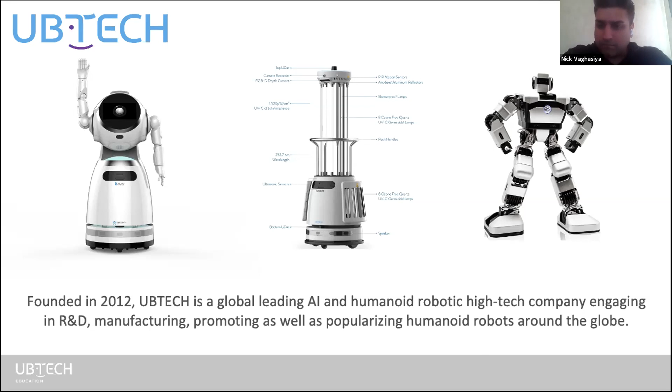To go into depth a little bit about the education division, UBTECH Education is a division of UBTECH Robotics, our global brand. Our primary resource is preparing all learners for the future of work, whether it's through innovation, technology, design, engineering, and even tying that into our core subject areas for today's learners. And developing and giving them the opportunity to have a high quality STEM product that allows them to grow into 21st century skills and utilize their computational literacy skills.

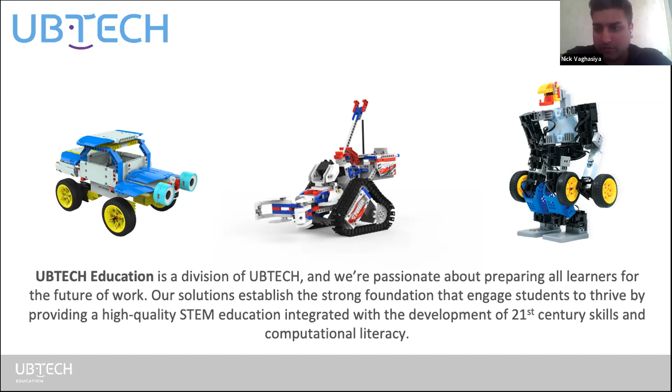And what you'll see here today is our U-Kits. This is one of our most popular classroom solutions. You'll also see it behind Matt in his backdrop. You'll have the beginner, intermediate, and advanced U-Kits. These are really an all-inclusive solution for students and educators.

They do come with all the parts and pieces. They come with the sorting trays, the cases that are stackable. They come with all the curriculum that's going to be required for teachers to utilize in teacher implementation guides. They're going to have teacher guides as well. And then they're going to have student worksheets that compile together with the free education app or web browser.

This will work on. As you see in this product, one of the philosophies that UBTECH has is that we want students to progress in their learning and their skills. So as students progress, so do the challenges and the kits. We're not changing the product on them, but we are adding new components, features, and things for students to utilize while they're developing their STEM skills.

As we dive deeper into each one of those U-Kits, I'll tell you a little bit about the beginner kit. It is an entry-level U-Kit. It does come with over 300 parts and pieces. And what's unique about this is along with the parts and pieces, you get 4 servo motors that students can program and utilize in the pre-built models.

This U-Kit particularly has 13 pre-built models. Each one of the pre-built models also comes with pre-scripted code so that for students that are visual learners, this is going to be a very helpful tool while they're utilizing the kits. It essentially allows you to start coding immediately and utilizing the robots.

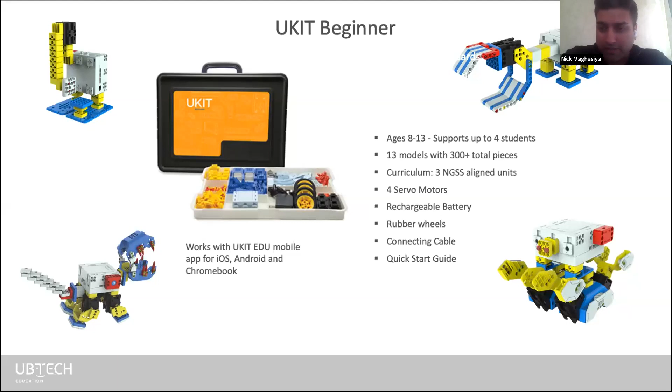Our next U-Kit that we have here today is our intermediate U-Kit. This one is a transitional U-Kit between the beginner and the advanced. It does have over 500 parts and pieces included. It looks exactly the same like the beginner, just the color's different, comes with a sorting tray and carrying case. But what we've also included in here is 15 pre-built models.

If you take a look at the images on either corner of this slide, you'll notice that these robotic builds are a little bit more complex than the ones that you saw in the beginner. That is something that we highly take into consideration, which is our scaffolded approach, not only to engineering, design, and building, but also to the curriculum, as the curriculum that goes with these kits aligns to the U-Kit.

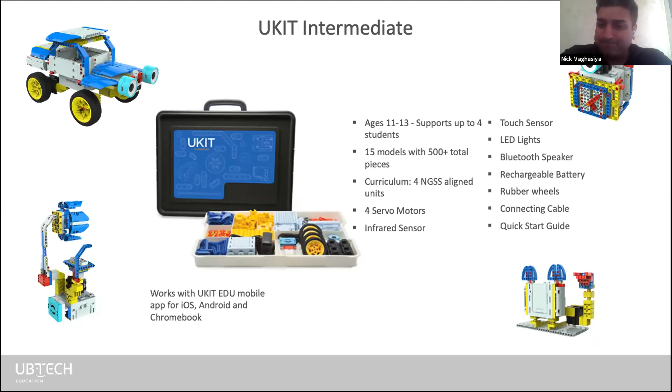Our final U-Kit that we have here for the classroom solution is our U-Kit Advanced. This U-Kit is something that I think is very extensive. It comes with a ton to do for educators as well as students. For example, over 900 parts and pieces in this U-Kit, but the look and feel of the case and sorting tray is exactly the same. There are some key attributes to this.

Going from the beginner to the intermediate, we are introducing sensor technology. And then in the advanced U-Kit, we take the sensor technology and also integrate it with a circuitry program. So in this kit, over 900 pieces, you'll have 16 servo motors. You'll have a higher grade sensor kit built in that also includes ultrasonic sensors as well as infrared and gray sensors. And then you'll have a circuitry program with circuitry lessons included. This model will allow students to build up to 38 robotic builds, and it does come with a different platform for learning.

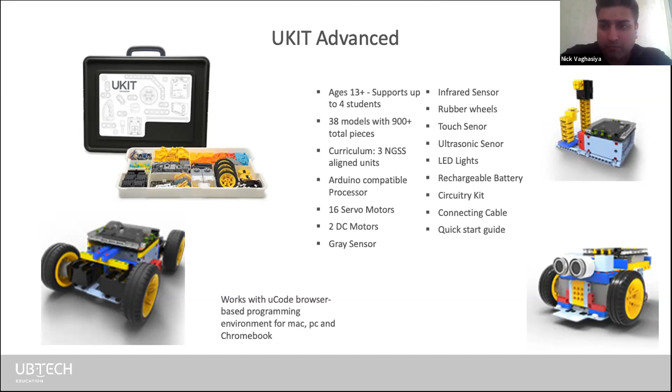So the UKIT Beginner and the UKIT Intermediate both work on a free educational app called UKIT EDU. It is downloadable, accessible on iOS, Android, and Chromebook, covering the full range of what most schools are using today as far as student technology in the classroom. And what's unique about the app is it has core functionalities.

Every product in today's market comes with an app, but what does that app do to create a meaningful purpose for students? In our app, we solve two problems. One, we cater to all learners. We have visual learning ability through our app, which allows students to not only see a code right off the bat, but they can actually manipulate the code, add to it, edit it, change the code for immediate response to the robotic builds.

We also have a tool in our app that is a key differentiator in our solution. We no longer show images of step-by-step guidance, but allow very interactive 3D 360-degree rotational movement for students. What this does is allow for increased accuracy in a robotic build, and it allows them to spend more time learning code and how to see the code.

Also in our app, we have two languages. We've got block-based coding, which is convertible into line text coding in Python. So it does take a progressional step for students that are starters and then getting more advanced into coding.

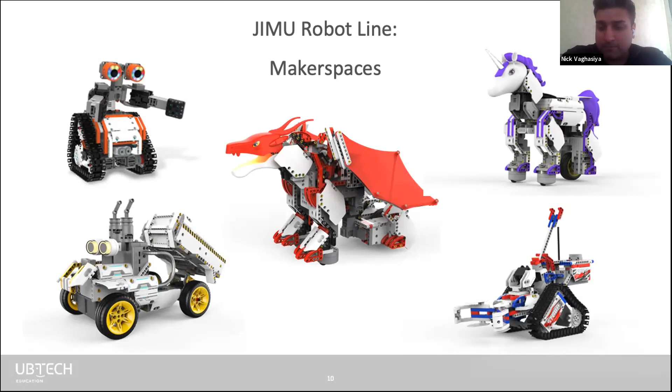And I'm muted, so no, I'm not muted. So thanks, Nick, for the introduction to our UKIT. I'm going to transition the conversation a little bit and move directly into our integrated STEM curriculum.

To give you a high-level overview, we developed 10 total NGSS aligned units supplementing our UKITs. We have 3 units specifically for the UKIT Beginner, 4 units for the UKIT Intermediate, and 3 more units for the UKIT Advanced. All of these are directly aligned to core science standards through NGSS standards.

We have also developed a full K-12 AI Foundations Unplugged solution, which is a new endeavor. This is all unplugged, meaning it's not directly aligned and supplemented with our robotic kits, but it's a way to bring foundational AI concepts into K-12 classrooms.

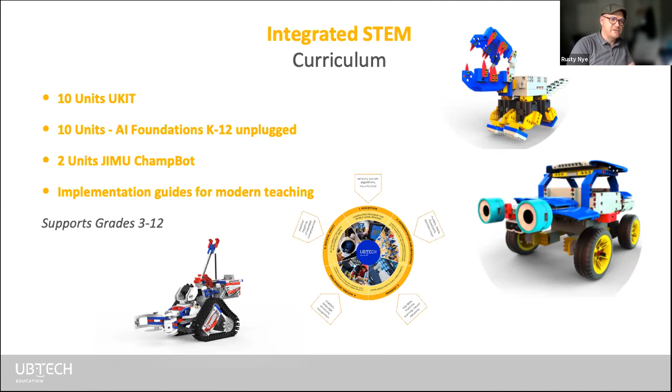In addition, we also feature a full NGSS curriculum with two units that are grade banded for the JIMU ChampBot. And as Nick mentioned, all of our curriculum units feature specific implementation guides, which we created in response to the changing educational environment due to COVID scenarios.

So when we talk about integrated STEM, what are we really focusing on? There are a few pillars for our curriculum that are unique and very important to how we've scaffolded and developed this content. One, all of our curriculum is intended to address core science concepts.

This is important because we want our curriculum to not only live in a computer science or STEM classroom, but we want the ability for science educators to bring our curriculum directly into a science classroom to help supplement some core science learning. In addition, we also directly address cross-cutting concepts in science and engineering principles as identified through NGSS. These connect back to cause and effect, patterns, and connections to the engineering design process.

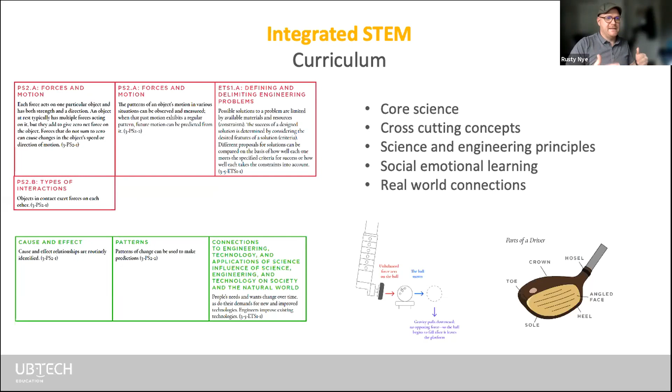In addition, we do directly acknowledge social emotional learning, such goals as leadership and working together throughout the entire curriculum. And finally, the last pillar that is a direct theme throughout our content is we really strive to make real world connections. So students are not just building robotics or coding for the sake of it, but they can see actual connections out in the world.

Our curriculum is all scaffolded utilizing the engineering design process. This is important to note because we strongly encourage students throughout all of the units and all of our curriculum to really participate in this design cycle. So students are really working through frustrations and failing upward.

For the educator, we have developed all of our content also in the 5E lesson plan structure. Most educators are probably pretty familiar with this structure, but this is a great way for educators to dive into content, know exactly the milestones that the students should be gaining, and where they can plug in particular aspects.

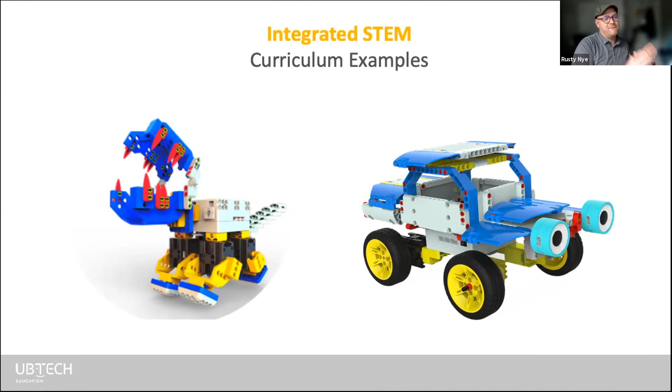So I'm going to transition a little bit and give you a couple examples from two of our curriculum units. I'll touch on an example from our UKIT beginner curriculum unit, featuring our dinosaur robot on the left side of the screen, and also feature a snapshot of one of our intermediate lesson units featuring our trolley robot. All of our units for UKIT and Champot are featured around a design and iterative approach to one of the robots they can find within the app or the browser-based software.

For the curriculum unit for the dinosaur robot entitled A Robot for Rescue, students are given the driving question of finding and discovering which robot design best meets the criteria and constraints of a rescue robot. The way we blend this into core science concepts is by exposing students to concepts of geology and biomechanics as they're building and redesigning this robot to render aid during a volcanic natural disaster.

So I know that might seem like a lot. How do we actually mash all that up together? First, we introduce a real world scenario of what a volcanic natural disaster could look like. To do that, we point directly to something that most of our students were probably born when it happened: in 2018, there was a large explosion, an eruption on the island of Hawaii, the volcano Kilauea.

So we paint a very realistic, touchable approach and scenario for the students. From there, we have the students start analyzing the geographic regions and the changes caused by such an explosion or eruption. They generate different sketches, analyze different scenarios, and think about how this would affect their robotic design.

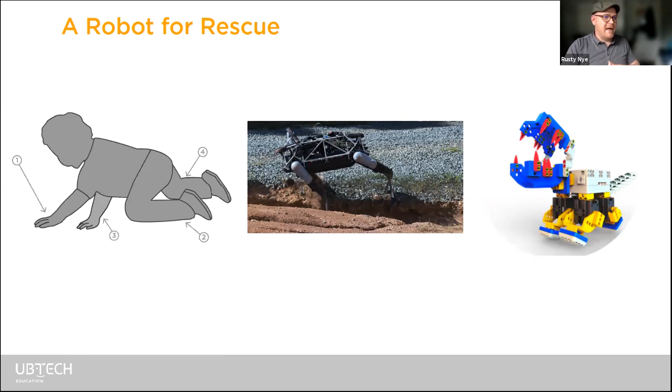So I'm going to transition and give you one more short example, looking at how we try to tie in these curriculum units back to core science standards as well as real world applications.

For another unit, a robot for tight spaces featuring our Trolley robot from the UKIT Intermediate. Here, students explore how robots can be used to help explore industrial settings as they build and redesign this robot to navigate through changing environments. The driving question students will be able to successfully answer by the end of this unit is: what is the best robot design for navigating through a pipe?

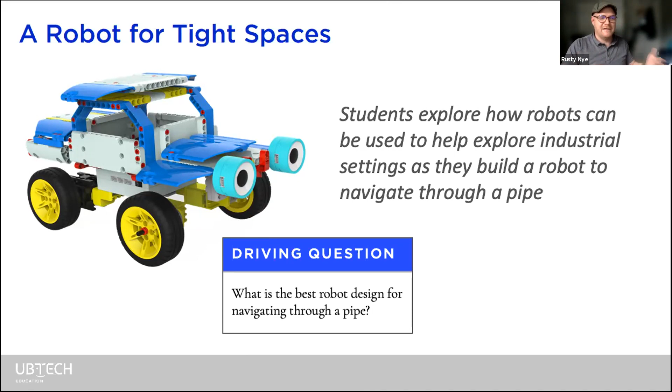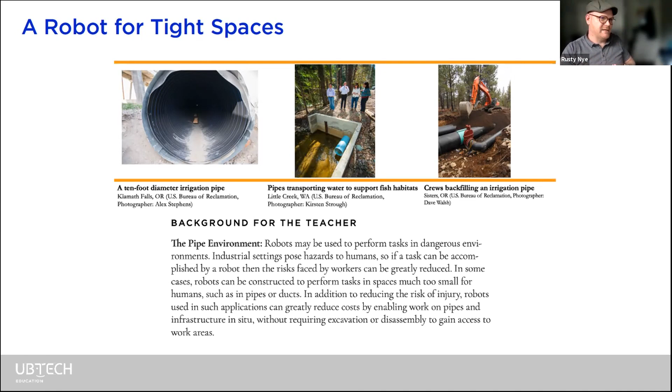That is a very open-ended question that can be answered through a lot of different lenses based on their discovery. So first, we start analyzing environments, making that connection back to real-world applications and careers of engineers trying to solve this problem, and start looking at different pipes. We provide the connection to actual engineers doing this exact work and the constraints they face when designing different types of robotics to fit in said pipes.

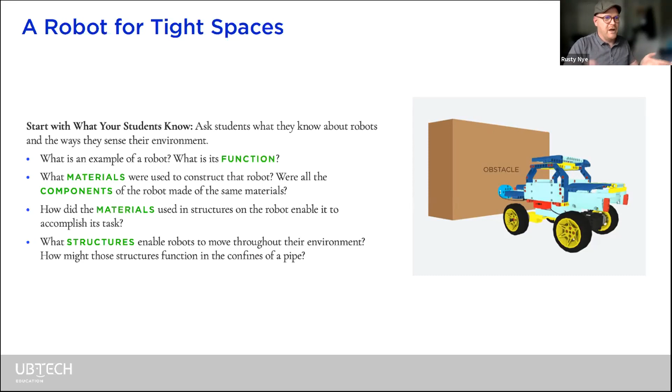From there, students start analyzing the function, materials, and structure of the robot they're working with. We try to make that connection from an engineer working in the field, looking at a pipe and having to design a robot that fits through it, to looking at the robot they've built and analyzing its function and materials. How can they change their specific robot to meet these changing constraints we've set upon them? Throughout the curriculum, we change those constraints, so students have to continually analyze and change their objectives of developing their robotic strategy to solve the problem.

Also, in terms of equipping students with future job skills and trying to bridge the gap between engineers working in the field and students working with classroom robotics, we've done quite a bit of research trying to understand how we can fold in some of those top 10 job skills that need to be developed for students moving into career fields. To help highlight those learning aspects, we've aligned quite a bit of our content to the top 10 job skills of 2025 as addressed by the World Economic Forum.

I've highlighted just a couple here as a snapshot, for identifying and addressing those analytical thinking and innovation skills. Throughout all of our units, students help solve complex problems directly connected to real world life experiences. We really try to bridge that gap to tangible concepts, so we don't want this to live in the cloud and not be something they can directly relate to. We hope most students haven't experienced a volcanic eruption too closely, but that's something they can easily look up, something currently happening that they can relate to on a real human basis.

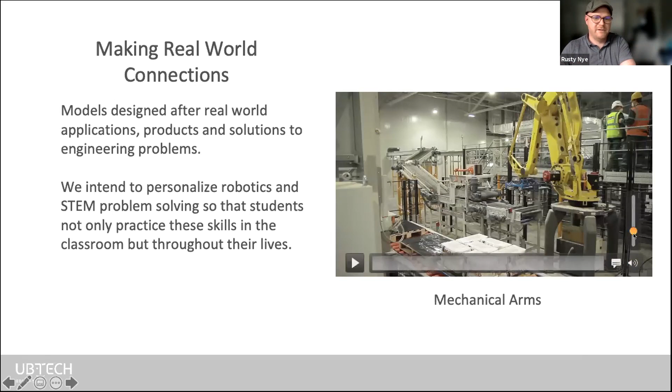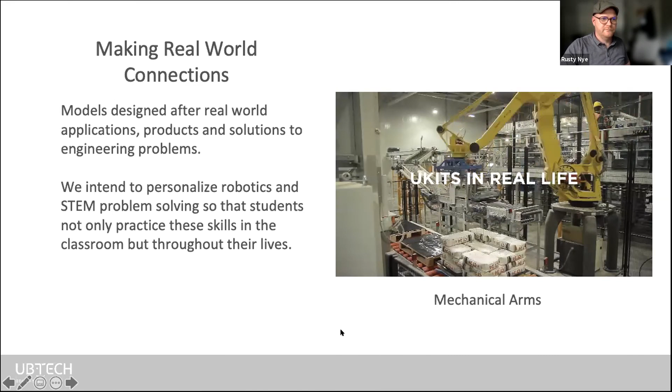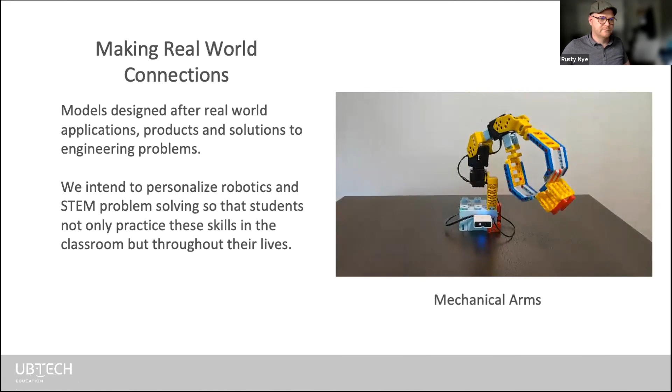So let's go ahead and look at a couple of different scenarios, looking at mechanical arms. This is featuring, as you can see, an IR sensor activating.

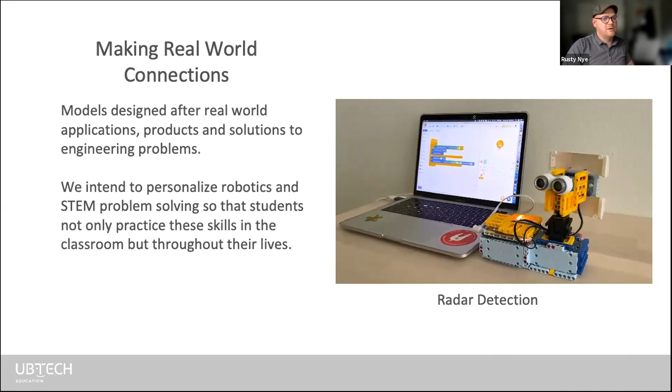You have 3 servos in that build, and that is for the UKIT. This one is featured within the UKIT Advanced, and is actually inspired by creating a radar detection robot. It utilizes 1 servo connected to our Arduino compatible microcontroller, and an ultrasonic sensor to give out a reading in a very similar aspect to a radar detection device.

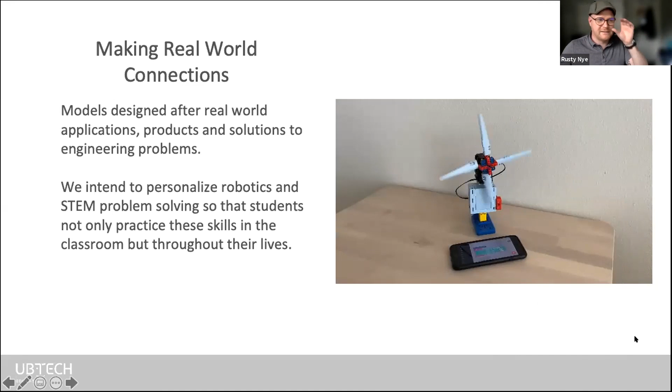We also try to utilize greener engineering technology for some of our inspiration. This is an example of utilizing wind turbines specifically for our robotics as a motivator. This robot is specifically geared and featured in the UKIT beginner. However, we actually have very similar builds, as well as a virtual greenhouse build for our UKIT advanced.

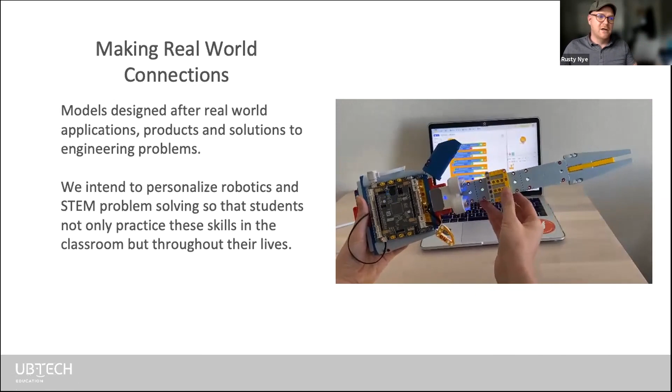We're not all stuffy engineers here, we also want to make it a lot of fun. So we even have different musical instruments that students can build and be inspired by. This is an example of our bass guitar, utilizing our UKIT Advanced and an ultrasonic sensor that can detect different distances and make an equation. We can write a program that when it detects distances from certain parameters, it will play a specific note. That's a fun one.

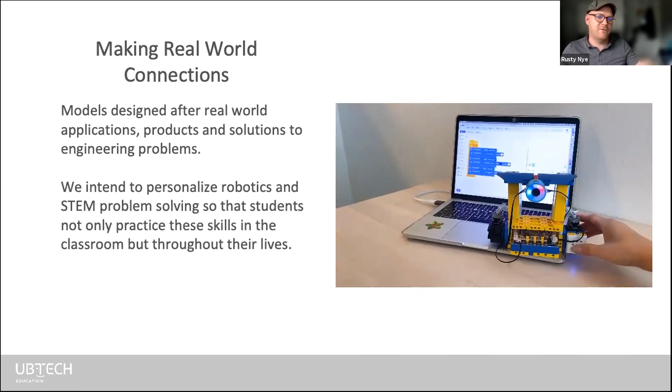We also engage and try to connect to smart home technology. This is an example of a doorbell robot. For the UKIT Advanced, it utilizes 2 servo motors and a touch sensor acting as your doorbell button, which also activates one of our really fun LED eyes, which give all of our robots a really nice personality.

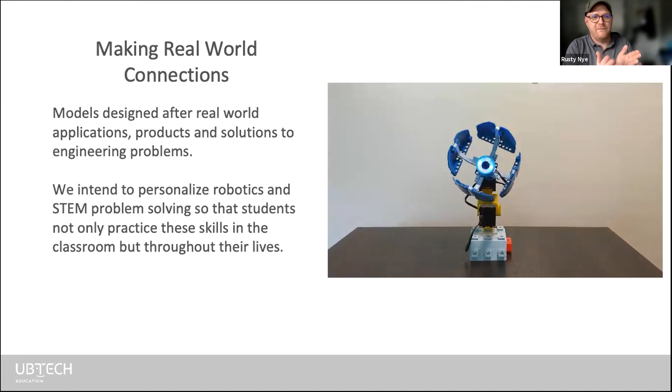And then lastly, who doesn't like to have a party? So this one is our strobe light robot, which is inspired by disco lights. This one is directly aligned to our UKIT Intermediate, and features 2 servo motors and a flashing RGB LED.

So Susan is asking, since it uses block coding, can her kinders do it? They already do block coding with Dash from Wonder Workshop. So she wants to know, are the JIMU robots and the UKITs compatible with her younger students in kindergarten?

Yeah, Nick, feel free to take it. I would say it depends on their level of comfort with block-based coding. Our coding is very similar to Dash and Dot and what you can do with Wonder Workshop. The difference in our app technology is that students get to build their remote or control device in our platform, in the UKIT app, as well as the basic functionalities. So if they're familiar with Dash and Dot and utilizing the coding that comes with the blocks, they can certainly do that with UBTECH's beginner. I would probably say start them off with the beginner UKIT.

In the AI library of the app, we have sample code for each one of the 13 robotic builds. So once your students are building the robots, they'll already have what the block code structure looks like for a basic movement, and then they can take that and alter it, change it, and edit it.

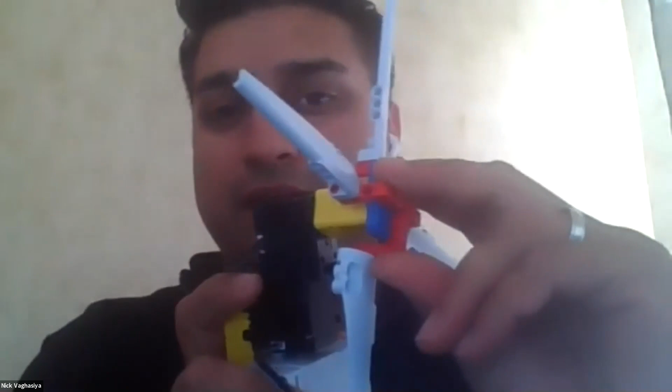I'll actually show you a sample because I do have a fan here. If you take this fan and rotate that servo movement manually, that movement is recorded into block-based coding. Essentially what we're calling it is reverse coding. We're the only ones in the market that have it right now.

So our app is used very differently than the other products mentioned. Not only is that a key differentiator for us, we have a scaffolded approach. So no matter what level you're at -- beginner, intermediate, or advanced -- we're not going to change the product on you, but we are going to allow you to grow with the product by increasing the challenges that come with it. Those are some of our core key differentiators from our competitors.

Awesome. All right, and since you mentioned the app, Maria has a question: is there an offline option for the software?

Yes, so I will talk about that as well. In our UKITs, one of the things you'll have internet access to is only to download the app. Once you download the app for the intermediate and beginner UKITs, everything is connected through Bluetooth technology, so you don't have to have internet access while the students are using the app.

Rusty, I'll defer to you on UCode and what your suggestion would be. So with UCode, it's currently a browser-based software environment, so it does require access to the internet. However, to transition to line coding, you can also connect it specifically with the Arduino IDE, so it is Arduino compatible for UKIT Advanced. All of the blocks and codes you build within UCode, the browser-based environment, can be exported into Arduino compatible language, very similar to C++, which you can upload offline.